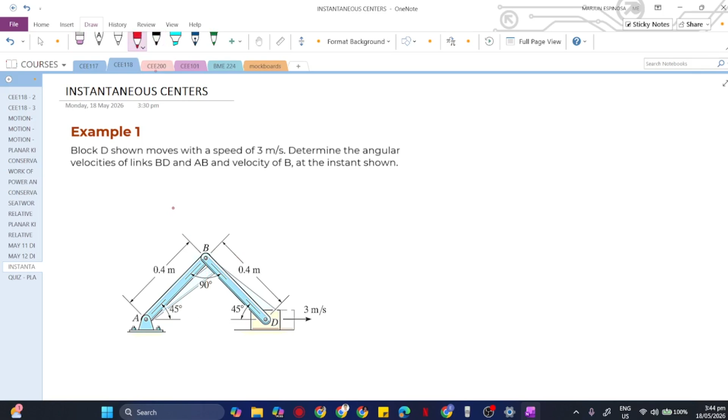And point B will move in this direction as well as in this direction. So if we get the overall or total magnitude of the velocity at point B, this is the direction. So that's our V sub B, using the instantaneous center concept.

I've discussed how to create or establish the instantaneous center. You just make a projection line such that it is always perpendicular to your velocity. For example, at point B, make a line that is 90 degrees with the velocity B direction shown by this arrow.

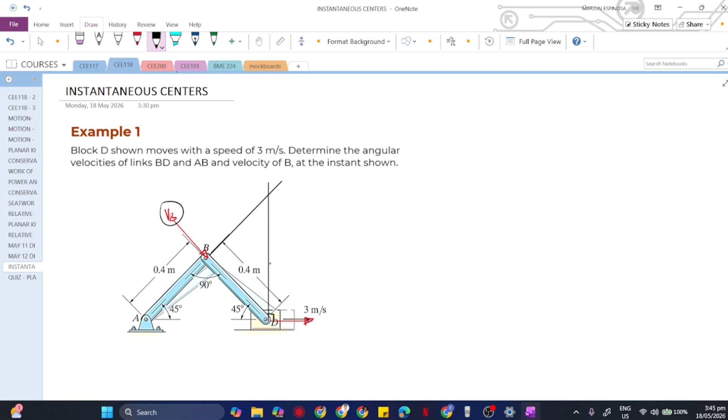Do the same for point D. Here we have a piston moving in this direction, so that is horizontal. Make a line there perpendicular to the velocity at point D. Where they intersect, B going there and D going there, that intersection point is what we call the instantaneous center with respect to B and with respect to D.

So this will be equivalent to R, the position vector of point B with respect to its instantaneous center. And this is the position vector of point D with respect to its instantaneous center. The problem here is to find this distance and this distance.

That's easy, class, because we have this side, and if this is 90 degrees... if this is 45 degrees, then all of this is 90 degrees, so most likely this is 45 degrees too, right?

Let's draw that diagram. We create a right triangle having sides: this is 0.4, and this is 45 degrees. So we'll get this side and this side.

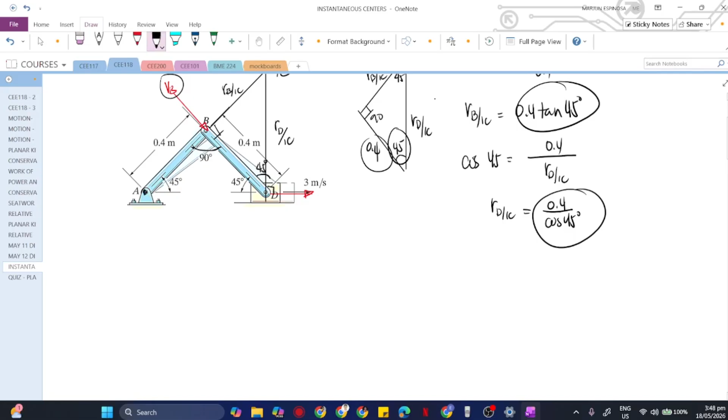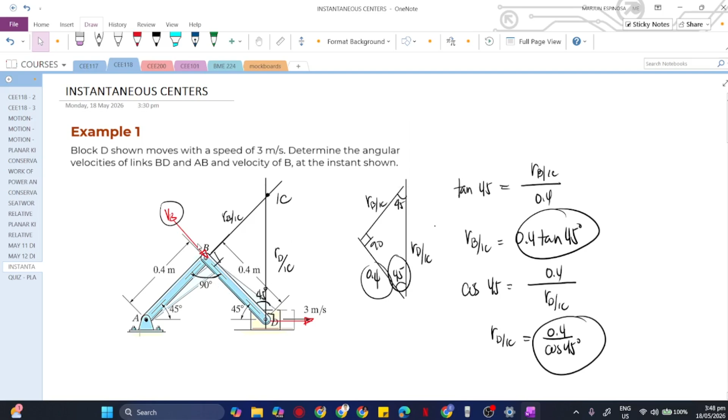For link AB, the instantaneous center is at A. That's it, and this is still our instantaneous center there. Now, the problem here is to determine the angular velocity of link BD and the angular velocity of link AB.

Before we get the angular velocity of link BD...

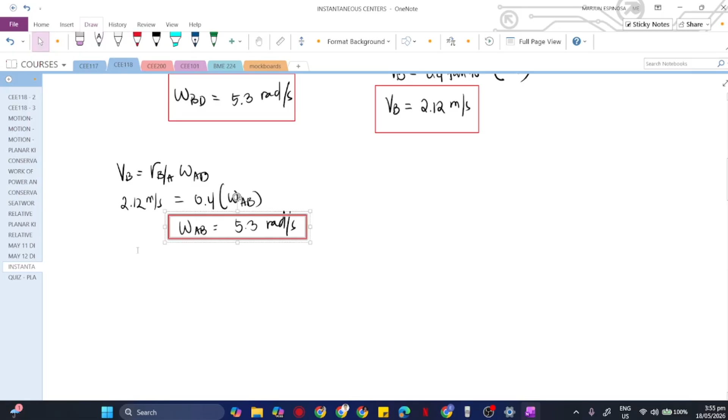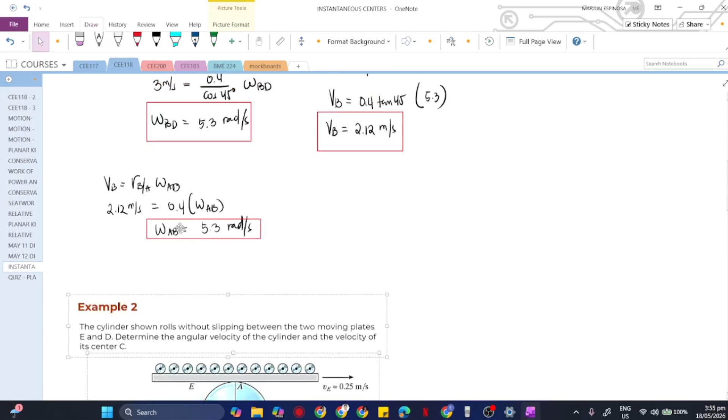Any questions? You can open your mic, no? If you have questions, and then if wala man din, you can also open your mic, sabihin nyo lang wala. Do you have questions, class? None po, sir. None po. Okay, thank you. Now, proceed tayo dito sa problem number 2.

Naka-record ba na ako? Okay. Problem number 2.

Okay, the cylinder shown rolls without slipping between the two moving plates E and D. So we have a cylinder here, it is rolling, and at the same time we have two moving plates moving in the direction as shown. On the upper part, we have plate E moving like a belt conveyor in this direction with a magnitude of 0.25 meters per second. On the lower part, we have another plate moving in this direction with a magnitude of 0.4 meters per second.

Now we are to determine the angular velocity of the cylinder and the velocity of its center at point C. We cannot really assume that the instantaneous center will be the same here, because we need to consider both the upper and lower magnitudes. So let's create a free body diagram that will represent our problem.

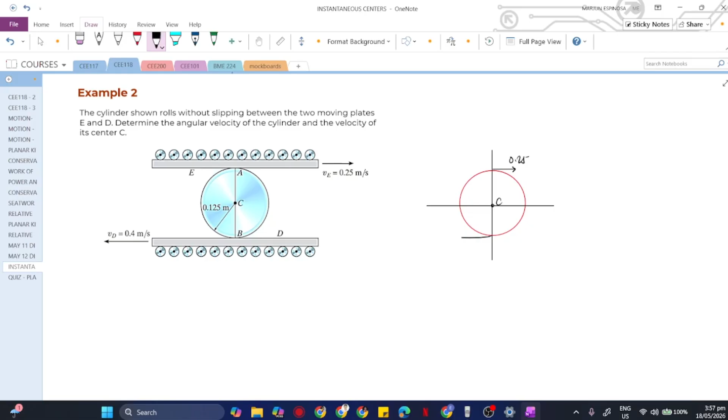Since 0.25 meters per second is relatively smaller than 0.4, we'll make that arrow smaller. Let's set up an X and Y axis to represent our intersection point C. Here's the arrow for 0.25 meters per second, small. And on the other part, let's make the arrow larger compared to 0.25, which is 0.4. Then we draw a line connecting these two arrowheads. Where they intersect on our y-axis, that will be our instantaneous center. That's how we get the instantaneous center, class, given this kind of setup.

So, to solve for the angular velocity of the cylinder - since upon moving in this direction and that direction, the direction of our cylinder would most likely be like this. So what is the velocity of our cylinder? Let's denote that as omega C, the angular velocity of the cylinder. At the same time, we need to solve for the velocity of the cylinder itself.

So we can just use the position of our point C with respect to its instantaneous center - this part, this distance here. We take that distance and multiply it by omega, omega C.

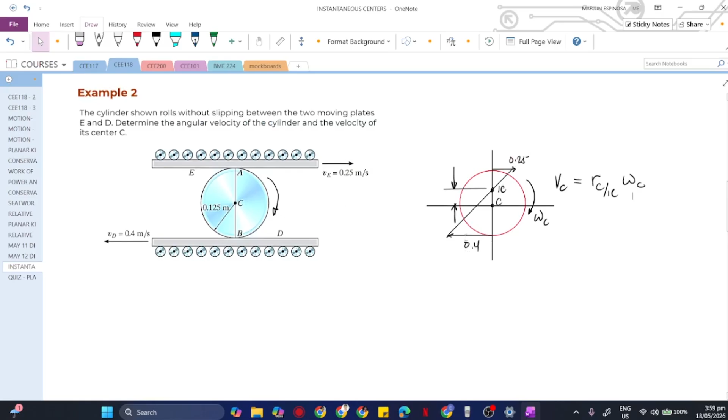So what can we get first here? We can get omega C first. Now how to do it? Since we have 0.25 and 0.4, let's try to redraw these two triangles - since they share the same vertex, we can use the similar triangle rule in geometry.

So let's set up a ratio and proportion. This one is 0.25, this is 0.4. And from this point to this point - since the diameter of the cylinder is 0.25, let's make this part equivalent to x.

So what's left, class? What's the length of this remaining side? The overall diameter, from this point to that point, is the same as here to here - that is the overall diameter of the cylinder, which is twice 0.125, so that's 0.25. Subtract x from that, so this part is 0.25 minus x, that's the distance here.

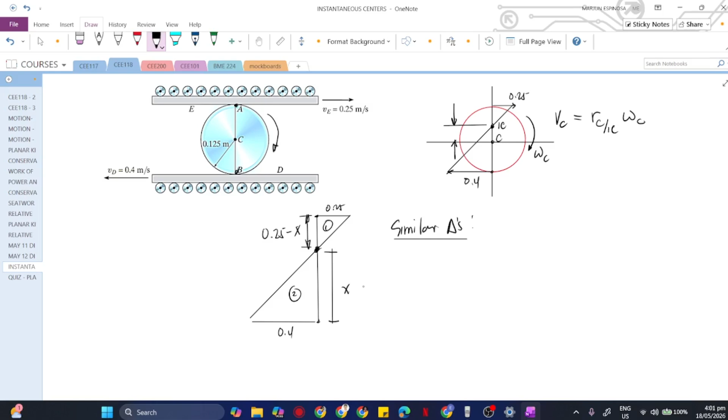Now using the similar triangles principle, let's take the smaller triangle first, and this is the bigger triangle. For the smaller triangle, the base is horizontal, 0.25, over the height which is 0.25 minus x. We equate that to the ratio of base to height of the bigger triangle: 0.4 is the base, horizontal, then the height is x. Cross multiplying, we get 0.25 times x equivalent to 0.4 times (0.25 minus x). Let's transpose this.

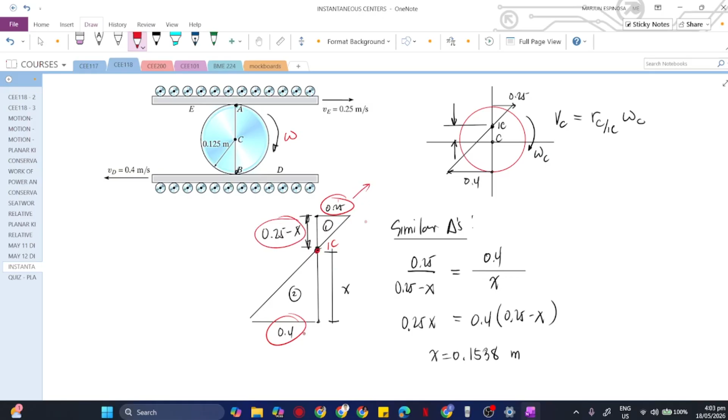Pili lang kayo anong gagamitin natin na velocity since they are sharing the same instantaneous center. Meaning to say, similar lang din yung magiging angular velocity nitong dalawa. Para to-prove that, unahin natin gamitin ito, then yung instantaneous center distance niya, ito yon, and then let's compare it with this one, 0.4, tapos yung instantaneous center na nakuha natin. Siguro unahin natin itong 0.4 because we now have the value of x. So for angular velocity ng ating cylinder, that is just equivalent to velocity ng D, okay? That is equivalent to yung position ng D with respect to its instantaneous center.

Ito na part which is obviously equivalent lang sa X. Equivalent lang yan sa X. And then it's to be multiplied by the omega c yung kukunin natin. Again, pwede lang din natin gamitin yung velocity ng E, itong part na to sa upper part, and then yung position ng E natin with respect to its instantaneous center. So that is basically equivalent lang sa 0.25 minus x and then omega c. Just to prove na similar lang yung makukuha natin regardless kung 0.25 or 0.4 yung gagamitin natin.

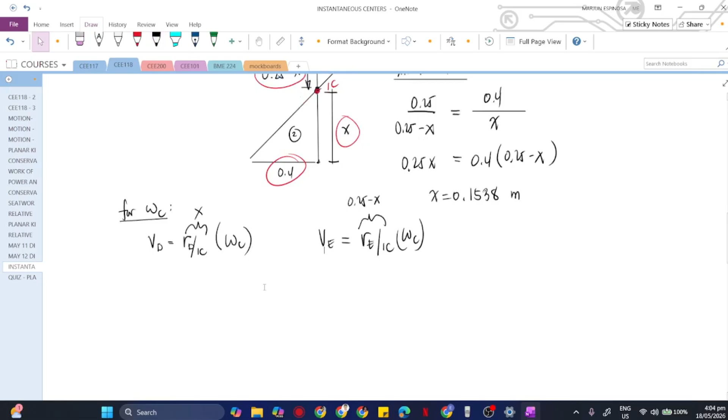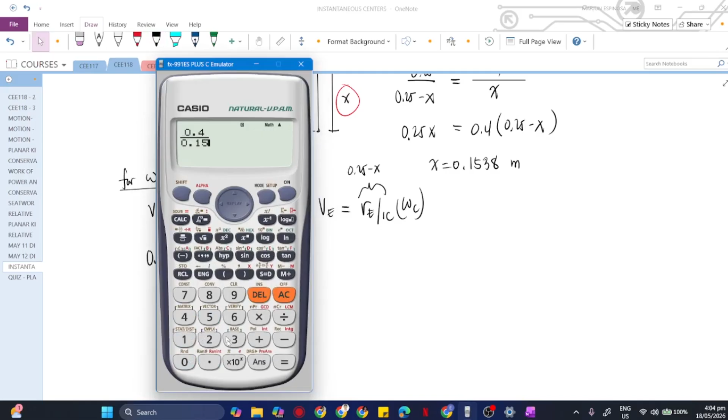Sige, so VD 0.4 yan. That is equivalent to r D/IC which is yung x natin na nakuha, 0.1538, then omega c. So yung omega c dito would be equivalent to 0.4 divided by 0.1538. So that is about 2.6 radians per second. Yan yung omega c natin.

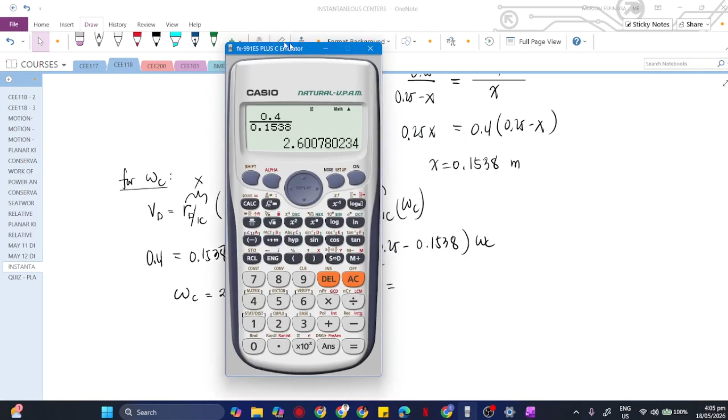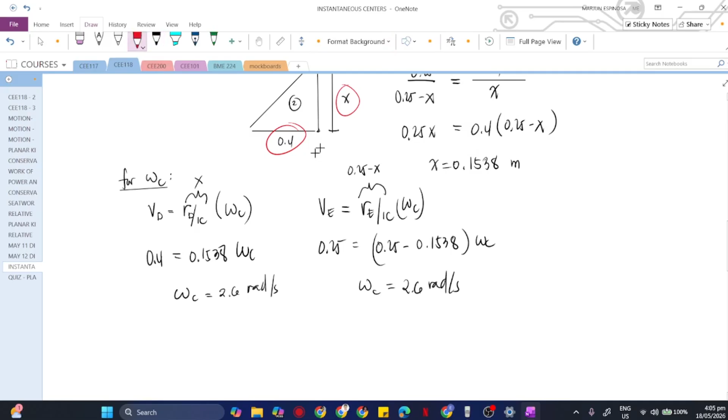Kung gagamitin natin to, 0.25 equivalent to 0.25 minus 0.1538, then omega c. Omega c natin dito would be equivalent to 0.25 divided by 0.25 minus 0.1538. So that is still equivalent to 2.6. Similar lang yung makukuha natin, 2.6 radians per second, because again they are sharing the 2 points, yung point D natin and point E natin, they share the same instantaneous center.

Similar lang yung makukuha natin. At saka lastly, yung tanong na last would be the velocity ng cylinder ng point C natin. So velocity ng point C will be equivalent lang yan sa yung omega c na nakuha natin, then yung position ng C natin from instantaneous center. So ano yung position ng C natin from instantaneous center? Ito yung na part, etong highlighted na part, etong part na to.

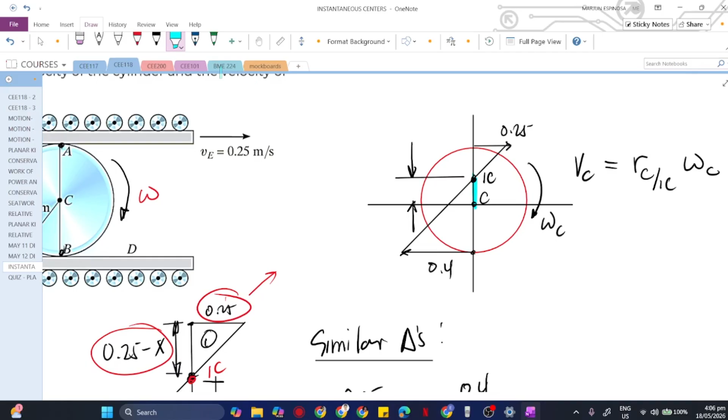So ano yan, class? Most likely andito yan. Ano to na part? Anong distance ito? From point C to instantaneous center. So ano to, class? RCIC. Since lahat ng to is 0.25, 0.25 yan lahat.

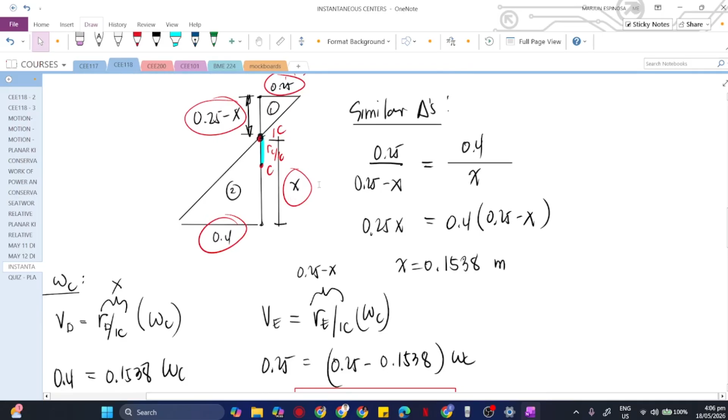Gawin natin is yung RIC omega c, omega c is 2.6 to. And then yung RCIC natin, so ang gagawin natin dyan is this one. Since lahat ng to diameter, that is equivalent to 0.25. I-subtract natin tong 0.25 minus x. I-subtract natin yung 0.25 minus x at saka itong x. That would be our RCIC. Nakuha niyo? So lahat ng to is equivalent sa ano?

Hindi, wait sandali ha. Mali pala. Hindi pala yung x dito. Mali.

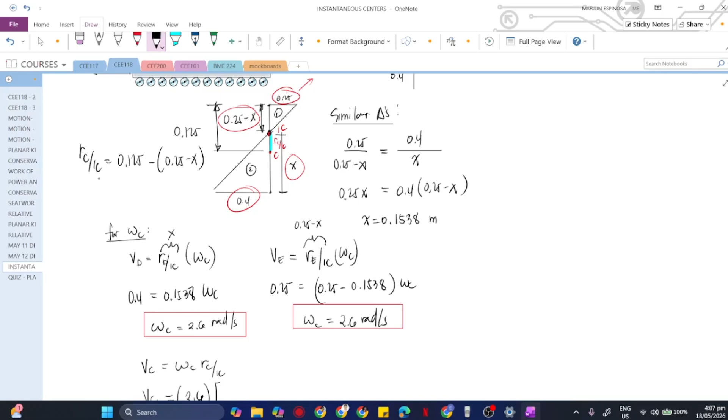Okay, so if this is x, since half na to, from here to here, ito na side. From here to here is 0.125, tama ba? So i-subtract natin tong 0.25 minus x, yan na yung RCIC natin. So yung RCIC natin would be etong part na to, which is yung radius ng ating cylinder, to be subtracted by this part right here, 0.25 minus x, yan na yung ating RCIC. So ito yung gagamitin natin for RCIC. Okay, so 0.125 yung radius to be subtracted by 0.25 minus itong nakuha natin na x, 0.1538.

Okay, so yung value na makukuha natin dito would be equivalent to 2.6 times 0.125 minus 0.25 minus 0. Importante yung parenthesis dito, class, kasi pag malimutan lang yung isang parenthesis, then that would be yung ibibigay niya na value would be wrong. So yung sagot dito would be 0.075. Sabihin natin 0.075, okay, that is meters per second. So ito yung sagot natin for this problem.

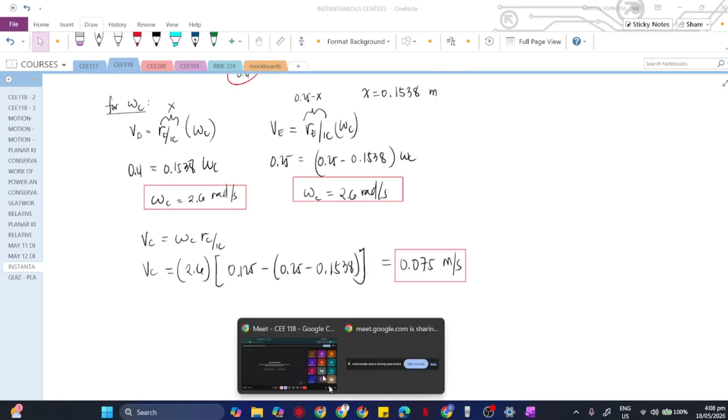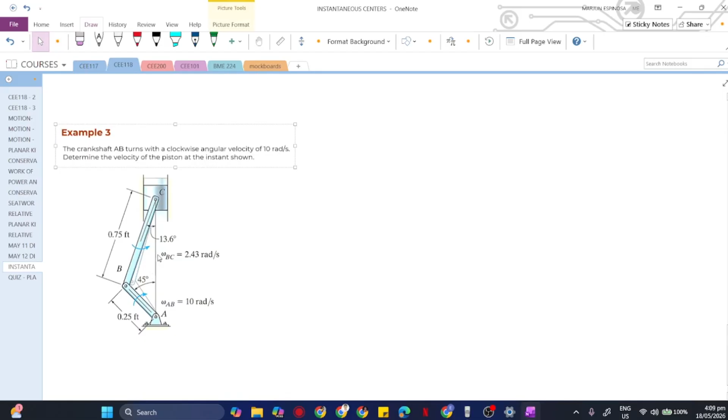Example 3, our last example for this day. The crankshaft AB turns with a clockwise angular velocity of 10 radians per second. We need to determine the velocity of the piston at the instant shown.

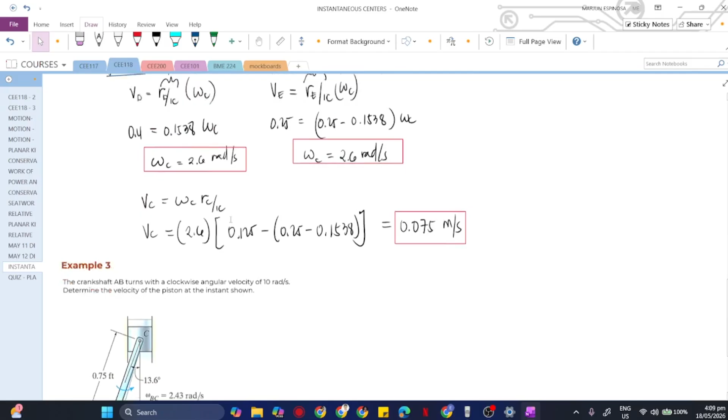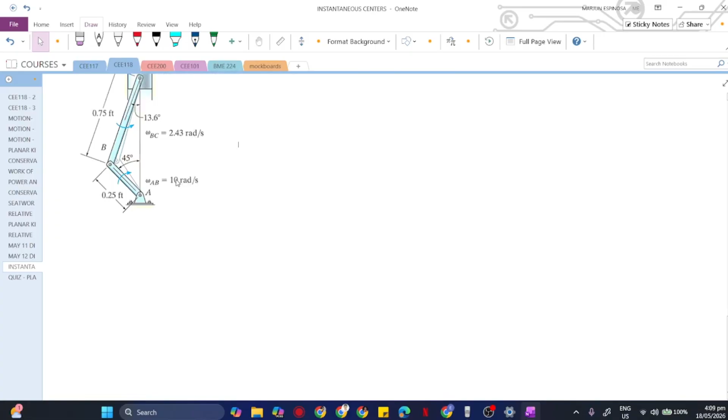This is similar to our first problem, only that the orientation of the piston crank cylinder here is vertical, while in the first example it was horizontal. That's why I'm telling you, for mechanical engineering students, this instantaneous center concept is important, particularly for machine elements. Although for civil engineering, it's still usable in dynamics.

Let's identify the instantaneous center first. The crank AB will be moving in this direction, with omega AB equal to 10 radians per second.

Similarly, the velocity B is always perpendicular to or along its direction. So this is our velocity B.

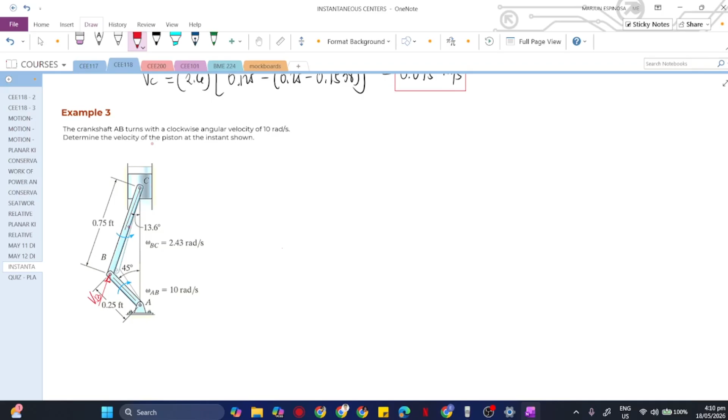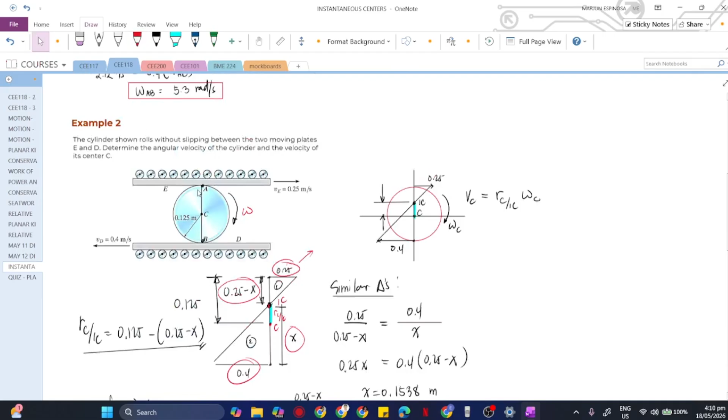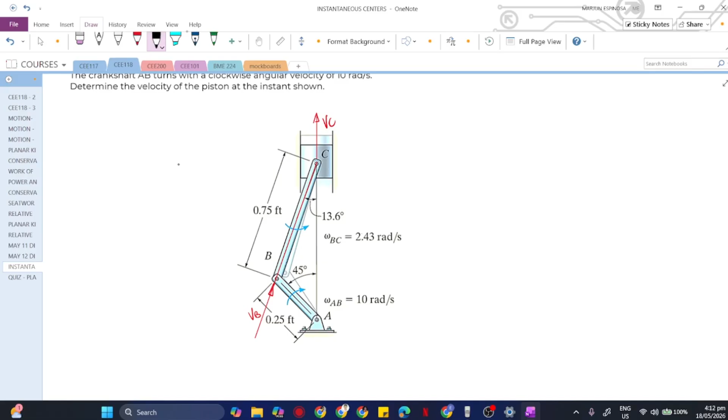this part. This is our velocity of C. From there, we create a perpendicular distance, projecting this line. So this is 90 degrees.

Then from here, we also create a perpendicular distance, like this. Although not very accurate, we'll be able to create this, so this is 90 degrees too. We'll be able to create a bigger triangle. Let's move this.

Okay, so this right here is our instantaneous center of point C and B. It's not very accurate, but my drawing is just not accurate, class. The instantaneous center location itself is correct, that's it.